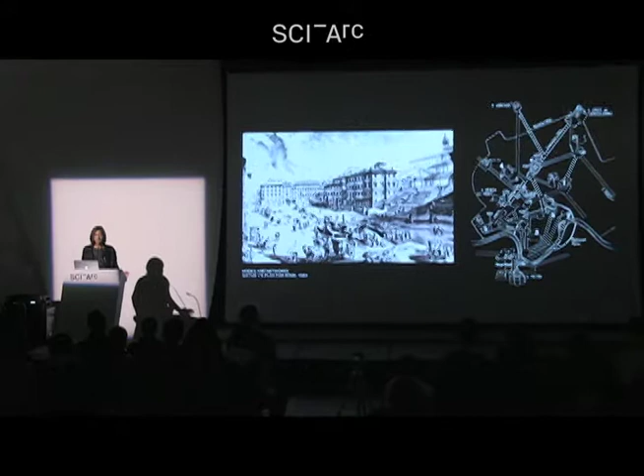When we started to think about Sixtus V's plan of Rome in 1585, here was Sixtus V coming into a decrepit city of over 100,000 people scattered over its topographical variations. He insisted on a network of diagonals that would lead you not only to monuments, but through the infrastructural connection of water brought through contemporary infrastructural terms freshly to fountains, which became the landmarks.

Which connected. Then 200 years later, with Specchi's Spanish Steps, the topographical challenge of connectivity could be either defeating and separating, or connective and so exaggerated in scale that the theater of connection became extraordinary. It became an inhabitable infrastructure that did so much more than just urban connection, but depended entirely on that network established nearly 200 years earlier.

This idea of synthesis, infrastructure, and networked occasions, in this case open-ended, a city that could actually lead you out and beyond, is in sharp contrast to ideas of fortification, like the star fortified cities that had an enduring history for several hundred years.

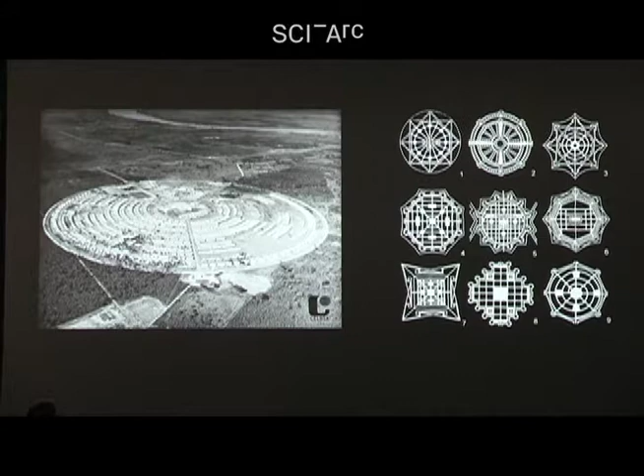When you think about the perfected form of the circle, fortifications were designed to keep others, unlike those inside, outside. I find it startlingly resonant with the backdrop of what's happening today.

If walls can be built to keep outsiders out, not linear or systemic walls but contained perfection, even temporal notions of round perfection are seen here with Villa Piloto, temporary worker housing for the factories of extraction important in Brazil in the 1960s. This temporal occasion made everybody immediately near the center, and the periphery itself a kind of fortification.

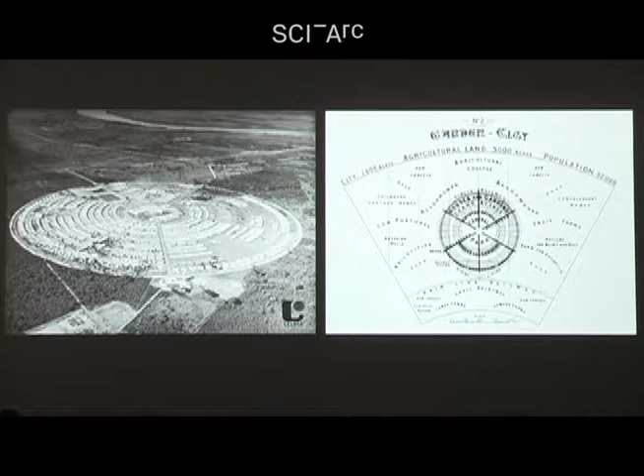But if you start to think of ideas of interconnectedness and isolation, the circle and those things around it, with Ebenezer Howard and others, started to generate the idea of garden cities. In those histories, the garden city of Ebenezer Howard's Cities of Tomorrow, or Geddes' Cities in Evolution, or Mumford's Cities in Development, the word cities is at the core, but the operative words tomorrow, evolution, and development are the secondary words that become intriguing.

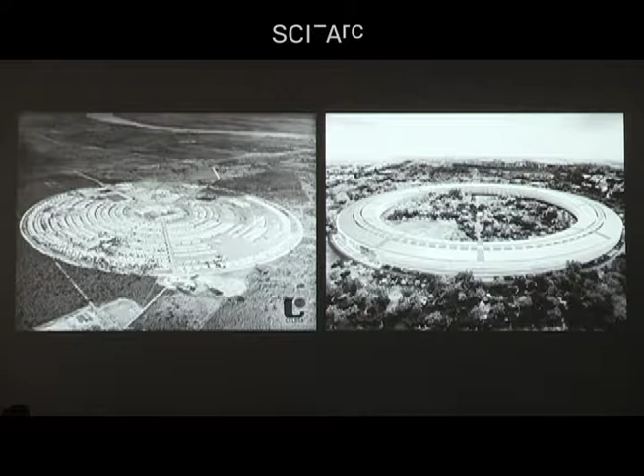But why this issue of fortification? Why is inside one thing and outside another? Why is there this enduring ambition with, in this case, over 2 million square feet of Norman Foster construction in Cupertino, expected to open very soon? Would we have a corporate campus for IT, looking as if it captures nature, but keeps everybody out?

So again, the form is important, but in fact the thing that's been our preoccupation is the connective tissue. And the connective tissue, whether natural or man-made, becomes an operative force that we are always in opposition to.

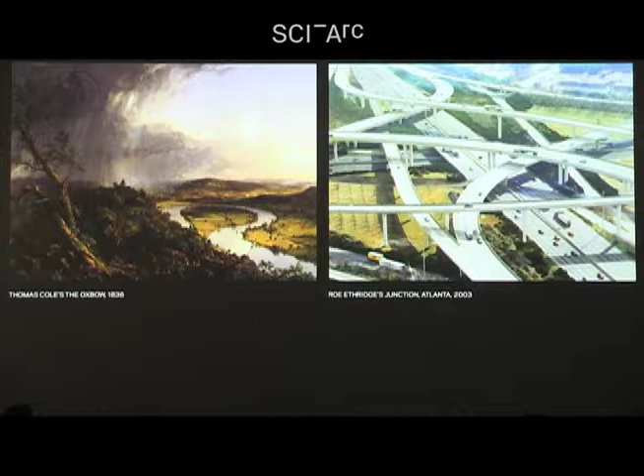If you look at Thomas Cole's The Oxbow of 1836, it shows the kind of wandering rule set that water can make in its own course, yet you see it in this truly picturesque setting that is very large. Roe Ethridge's Junction, Atlanta, one of my favorite incredible artworks, is indeed looking down at the artwork of infrastructure, which is so profound in the amount of physical energy embodied in concrete to bypass the very place it exists, to do this monofunctional thing to connect at great distances.

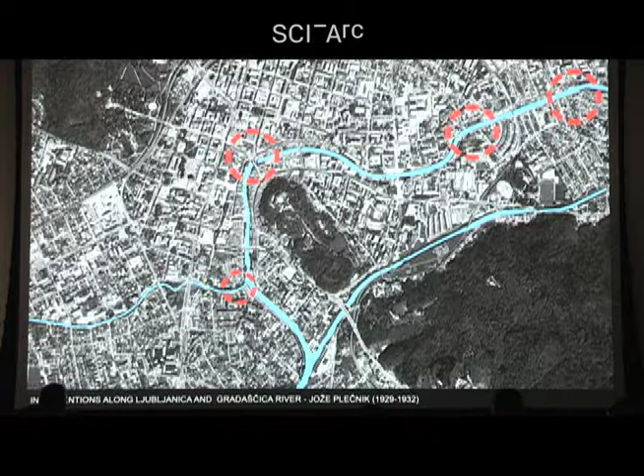Some preoccupations on our minds have to do with architects who are truly quirky and strange, in this case Plečnik in Ljubljana, who was preoccupied with the form of water in the city and the obligation to actually connect and fortify in the same breath. His triple bridges from 1932 are this astonishingly beautiful excess—he was kind of a Gaudi-esque character in his own way. There could have been just one bridge with pedestrian passages on either side, but instead he has the central bridge for traffic and two pedestrian bridges on either side, becoming a landmark of infrastructural destination and iconicity for the city.

He also worked on the fortifications of the walls. These banks flooded and became problematic, so you can see this notion of architecture and fortification operate further down the river. But less known and far more interesting to us is that as it pulled itself out of the city dealing with flooding, it became a stepped, relaxed fortification so that when flooded it would go up to the upper level. In summertime, when dry, it would create multiple promenades and levels, so when the city was most attracted to stroll, there was a multi-leveled promenade created by the absence of water.

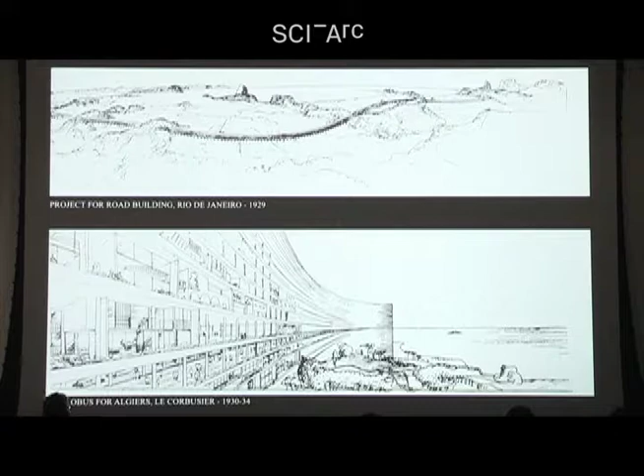So Plečnik really understood the operation of an inhabitable infrastructure—not so far off in the 30s and 40s from Le Corbusier's fantasies for inhabitable infrastructure: the project for road building in Rio de Janeiro, and then the Plan Obus for Algiers, where the notion of movement and inhabitation might simultaneously coincide and one-up each other.

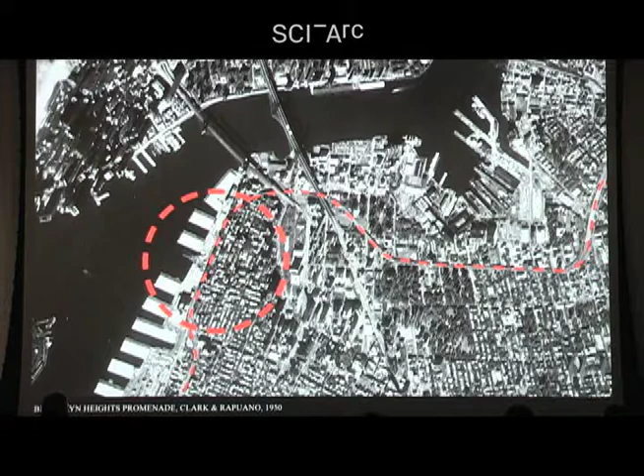Right near where I live in Brooklyn, there's this fantastic story where Robert Moses was going to charge through a historic little neighborhood with the Brooklyn-Queens Expressway, and there was a huge outcry. So there was an invention never before seen—here it is in 1950—leveraging the sectional topography of the 70-foot grade change from the city to the water's edge to create two lanes of traffic and a pedestrian promenade above. You can see this inhabitable infrastructure that is truly extraordinary.

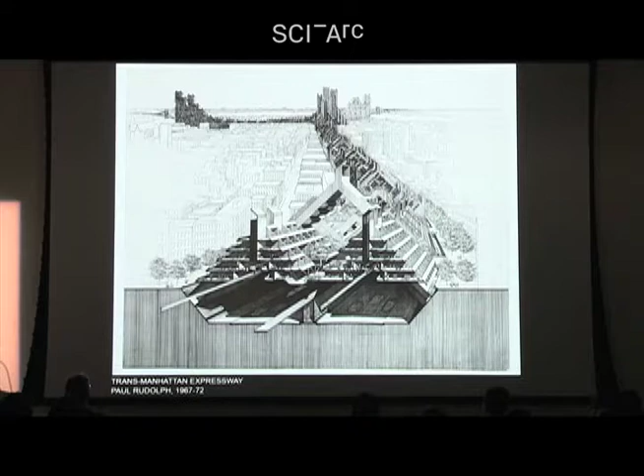That led to many other fantasies even later on. The Ford Foundation, all about cars, funded a fantastic study where Paul Rudolph came up with a kind of expressway or freeway that could cut through Manhattan and yet still produce housing in the very streets where housing could never exist.

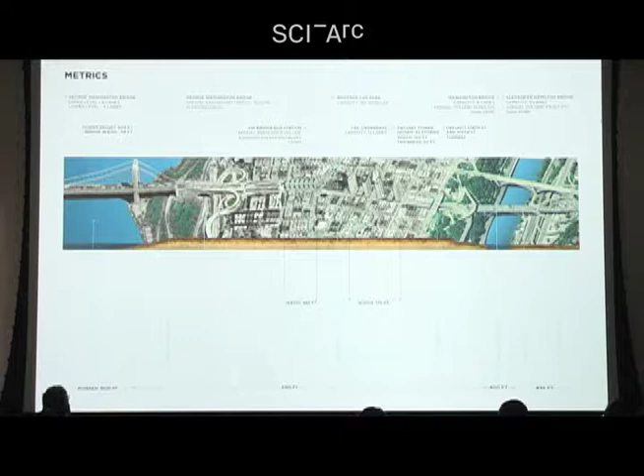This whole idea was fully realized, inspired by the GW Bridge as it cut through and tore down city blocks to continue across the island, producing the most incredible, incomplete, utopian product I've ever seen—the Nervi bus station, the high bridge towers that spanned across the cut and moved across the water. That incomplete utopia suggested all these things might exist at once. Nervi was the first Italian architect brought in to produce this remarkable form.

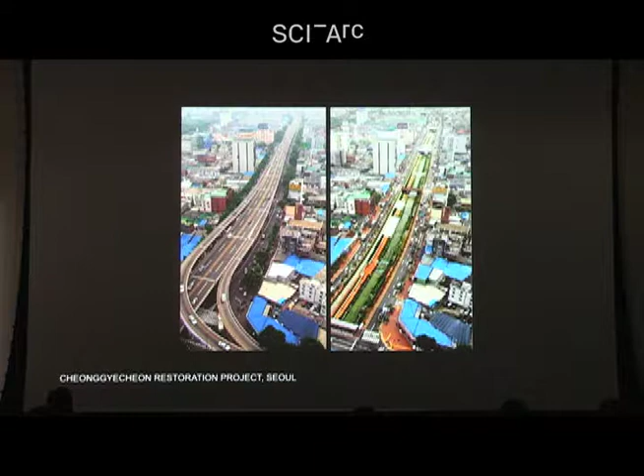But again, Cheonggyecheon is yet another thing—in Korea, the idea of a highway that divided was torn down to reveal a park and 27 bridges that could connect, reintroducing an ecology of a lost river that had been overcome by the freeway and returned.

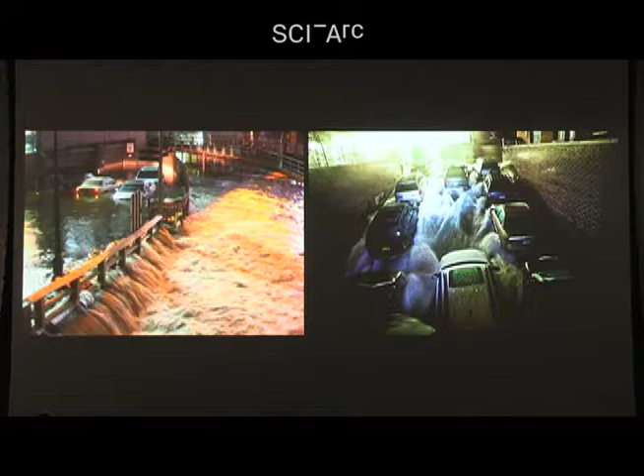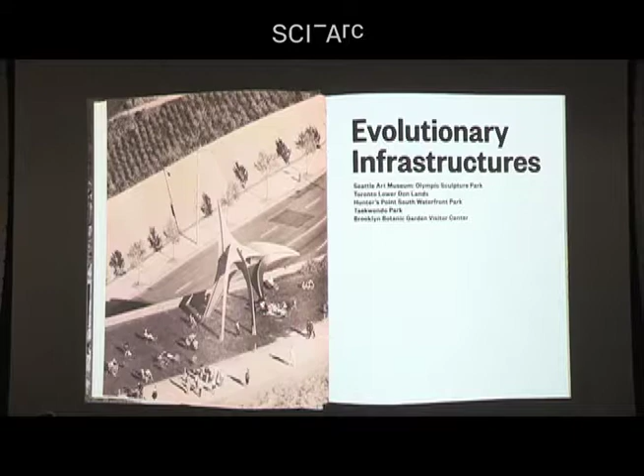All these preoccupations we organized about a year ago and produced a book called Public Natures: Evolutionary Infrastructures. Our thought was there were a couple of things we were preoccupied with: one was the notion of things that affected the structuring of public space in the city, and the other was social infrastructures that create a scaling of place that might reach out and have more territorial engagement.

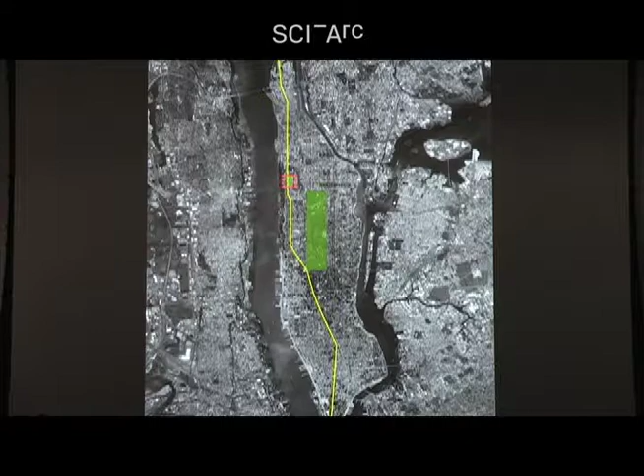So what I thought I would do is share some images here, a small snapshot of projects that are both urban in nature, but actually take the thesis from material expression back into a territory that hopefully engages the city.

Barnard College, right across from Columbia University, a women's college, only 4 acres, quite a comparison to Columbia's neighbor. But very much like Columbia, surrounded by walls, and those walls marked by gates, and in fact the Women's Campus Center, because it's a women's college, marked by concrete.

They wanted to do a creative arts center, and so we said, let's find out what's behind the wall, which were two layers of landscapes 20 feet apart. And we said if we need 100,000 square feet of building, then somehow we might connect two divided landscapes, but also create interior topographies that might carve through architectural forms to bring sectional connections.

This in this case involved tearing down the bowling alley, which was a social center for the school a while back, and turn it into a topography that connected divided landscapes, taking the kind of crosswalks of a campus into crosswalks on the side of the building.

That might actually reveal inside the kind of connective tissue that creates a social infrastructure of engagement, so that everybody in the architecture studios on top are looking down to the cafe and reading rooms below. This notion of specular use, normally hidden through section, is actually utilized in spaces that could be interconnected and woven through movement.

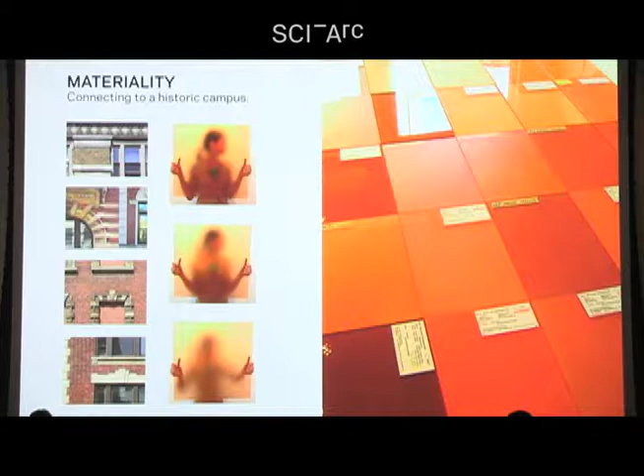And then ultimately that expression of movement and engagement is something that's inscribed and projected from the surface of the building, but that surface wanted to have the indefinite character of the brick campus through a new medium here with externally acid-etched terracotta color chromatically infused glass that correlates with the bricks.

Offering some kind of compatibility that ultimately, as it joins the family of brick campus buildings with its own stature, has some capacity to transform what is a wall into something that is really an illuminating reflection of the section of engagement inside the Diana Center.

So that first question of whether it's part of the city or independent becomes all the more confusing when we start to think about the idea of landscape and city.

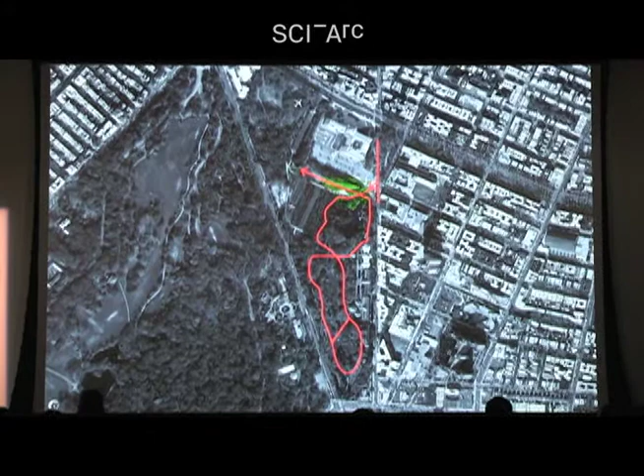With the Brooklyn Botanic Garden, we had this very interesting question of a 52-acre garden embedded within the city, but has always had some very strange relationship where the city looks like one thing above and the gardens look like something entirely other on the other end.

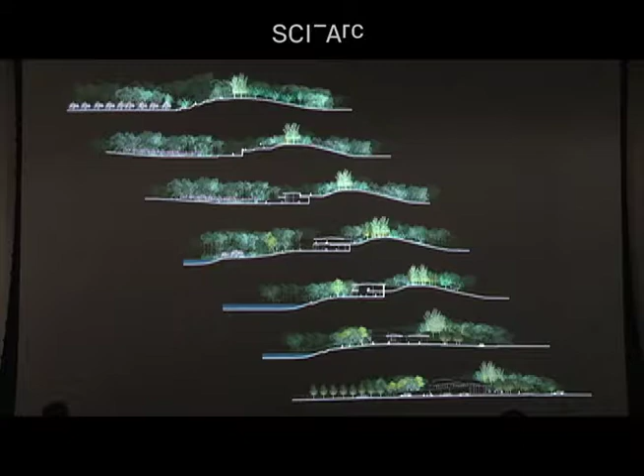Find yourself moving from the city and leaving it behind through a kind of sectionally modulated gradient that is part architecture, part building, part infrastructure.

So that kind of wandering guise of trellis light through the acid-etched glass above, or the radial conditions marked around the tree drip line that we had to watch out for, this very fantastic tree.

And then the kind of flat iron effect of choosing the city to the left or the garden to the right, or the visitor center inside with its own orientation, or finally the only two-sided room in Brooklyn that seats 160, is really this idea of transference of what it means to actually host and inhabit an edge of a path.

To inhabiting a landscape, to embodying the whole idea of movement above and through, so that the upper level of the embankment of the garden allows you to simultaneously see garden and architecture. And in fact, sometimes the architecture disappears because it's a high operation green roof that has 44,000 different plants that change over time.

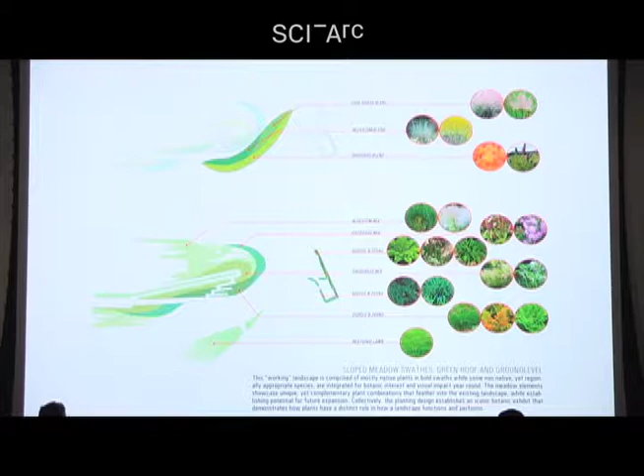That have seasonal capacity to become invisible in the park, that hosts new life, problematically so, but could be almost something that disappears when seen from the Japanese garden, so that the architecture itself is far less important than the garden it produces, but it ultimately is this tethering line between city and garden.

Now, again, we enter a lot of competitions because competitions ask bigger questions. And the Sylvan Theater competition, which we were fortunate to win on the National Mall in Washington, took the idea of this outdoor theater, which is the only outdoor public venue in Washington.

The rest are monuments or indoor memorials or Smithsonian institutions. But it's really on the sleeve or the corner or the edge of the Washington Monument, 400 feet away.

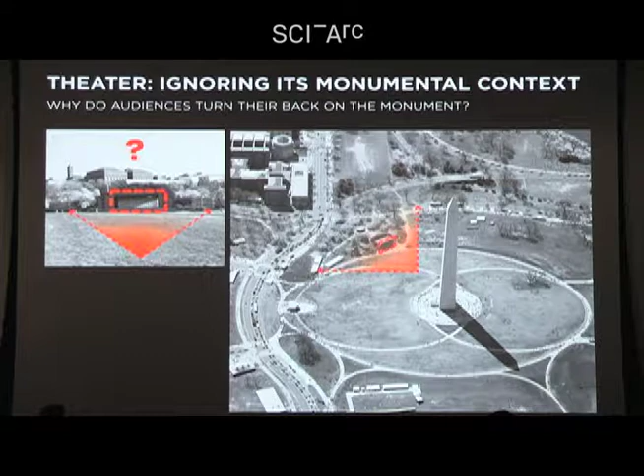A kind of sad remnant, rebuilt in the 70s even though it was visualized in 1917, as this plywood affair. You could see where it's located with the bathrooms in the back, the tour buses behind that, and everybody was looking from the mound of the monument terrain to that backdrop. They wanted to re-envision it and make it better.

Our point was that, in fact, if you made it better, you'd still have right behind you the buses. But if we could think about it further, we could actually say that maybe it takes monumental Washington and even the beauty of the tidal basin and simultaneously create a new theater, but also create new connections to landscapes that have been divided permanently by roadways.

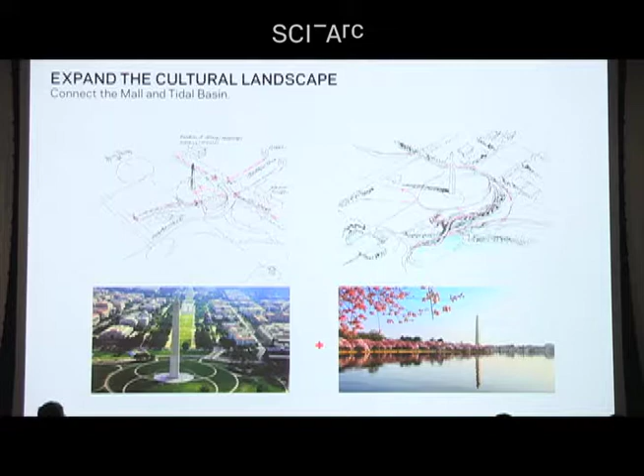So taking the notion of Sylvan, which had been her goal, to make it truly Sylvan with a grove of trees inspired by things like the Swarthmore Amphitheater, we did the most important thing, I think, which was to question the existing Sylvan Theater's orientation and suggest that the backdrop should always be the Washington Monument, not the buses.

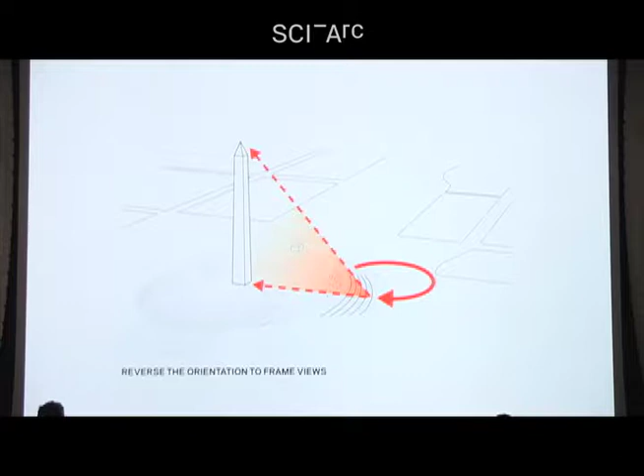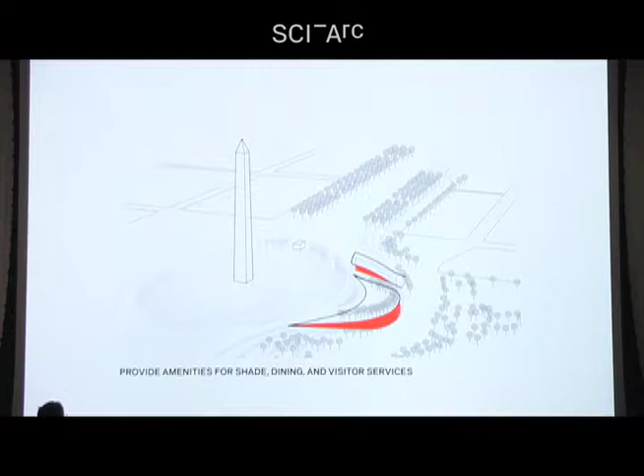And that if we could reorient that, we could actually lift the land, and through that lifting of the land, house all and conceal everything that was not so great to look at, like visitor services and the restaurants, et cetera, underneath an earthen berm.

By the time we get at the top of the earthen berm of this amphitheater, we'd be clearing 26 feet over the freeway so that we could actually wander over to the tidal basin and simultaneously slip down and stay within the required height that could not exceed the base of the monument. You could start to see the mapping of it, but the whole point was for it to be incredibly impactful and barely visible. And that's a tall task.

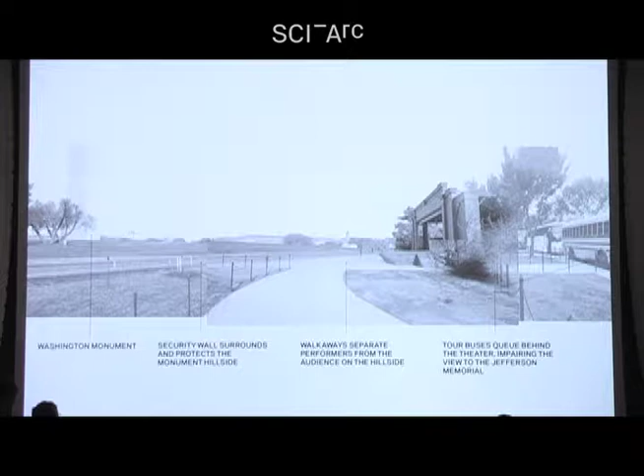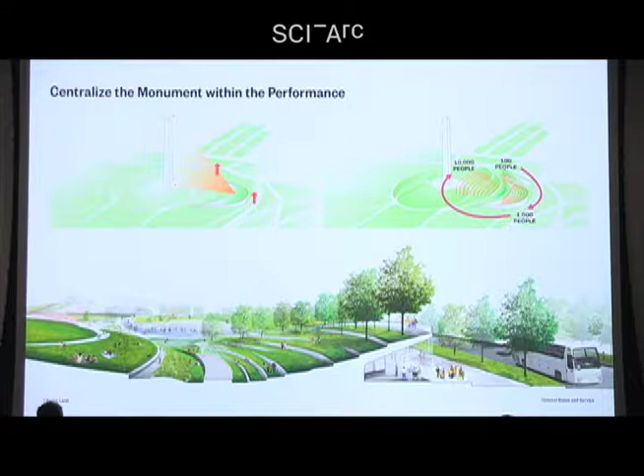And then this is showing how the operative section actually allows us to have groups as small as 100 or as large as 1,500 or 10,000 people with this three-sided theater notion all at once in the pavilion, for the kind of first food service, if you will, on the mall, will be just beyond.

And that lifting of the kind of dining pavilion is something that, again, can only cap out to the top of the mall. But the idea here really was to say, as barely there as possible could be the invitation potentially for some magic. Okay, it's not quite a smooth animation.

But again, the next question really for us got to questions of how to take very hidden things in institutions and universities -- in this case, University of Pennsylvania -- and take the Nanotechnology Building and try to make an urban statement for the most hidden yet shared service of an invisible science being forged there.

Now, the interesting thing for us is that as we started digging into nanotechnology and got ourselves lost in that kind of world of research, we started looking very hard at the city of Philadelphia and West Philadelphia, where the university is, and noticed that the one thing that they all shared in terms of identity were a series of green spaces.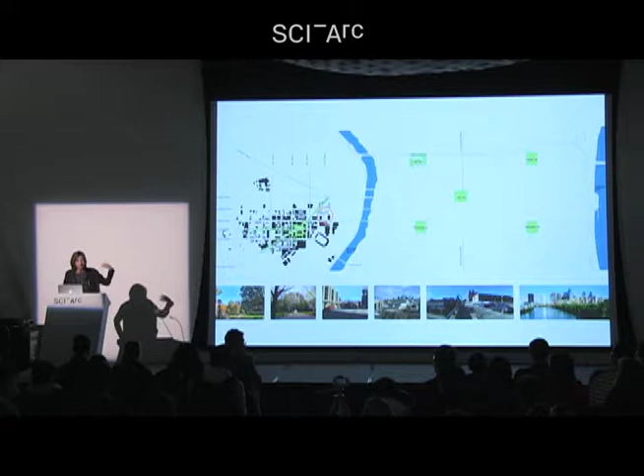So that was interesting when we looked at the engineering area, because there was no landscape to be seen in this particular area -- not one of the most compelling parts of the university, but closest to the city itself. So what we started to look at was this question: well, the whole engineering area had no green.

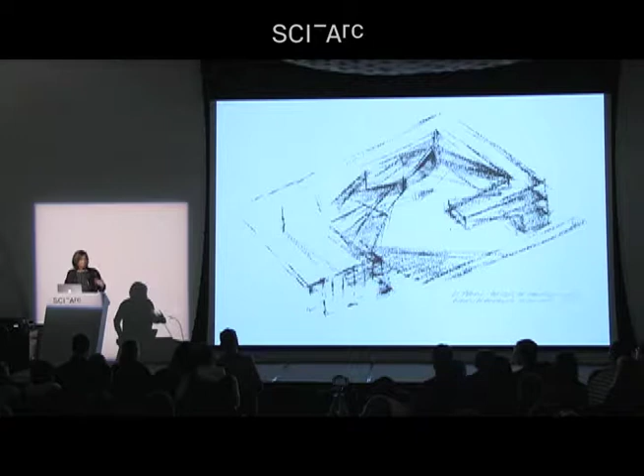And if you look at the upper diagrams as they unfold, we actually had to keep most of the boxes of those labs in the back of the site because it's the most vibration-free and electromagnetically free. They were very site-specific in terms of those labs, but others could strand to the city.

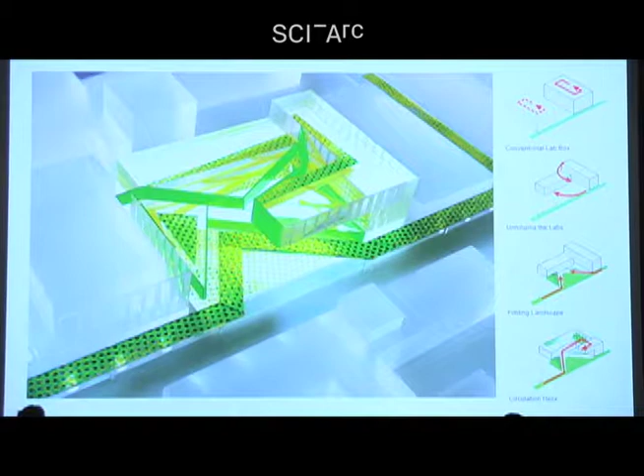But the only thing that didn't have vibration criteria that was controlling of the actual research work was the place of gathering. And so while the program required that there'd be a gathering space on the main floor, it was the most important space to locate these vibration-free things.

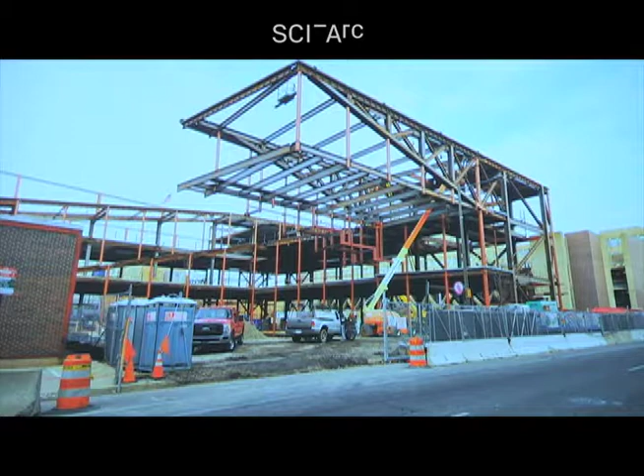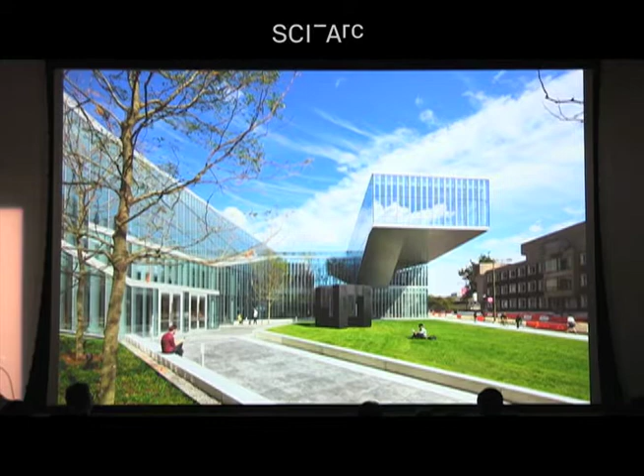So we actually moved up to 40 feet, the place of gathering. Now that's a weird thing because we wanted to also produce a large green. And so by elevating it, making it column-free, the 68-foot cantilever does a lot of work. You can start to see the operations of unfolding, engineering that unfolding so that it could reveal, in fact, a green.

So you can start to see here, there was also a great uncovering. This is Tony Smith's piece, We Lost, which was found in storage by the Dean of Engineering, Eduardo Glandt, who was our most visionary client. And so that became the kind of icon, if you will, of the gateway. But what became more iconic for us is how do you reveal this hidden science?

We visited all these nanotechnology facilities. Almost all of them are in the basement because the earth mass is the most vibration controlling, and they could also have no natural light in there. They all had little orange portals to look in. We said, well, what's up with the orange portals? They said they blocked out the UV rays, which they couldn't let in the light. And we said, well, what if we made orange portals into a whole wall and had no barriers? Could we do it? Nobody could say no, because it actually could be done.

So this is the first and one and only amber wall that reveals all of the nanotech research that's going on in the clean room. And then in those areas where natural light could come in, we pulled into the basement spaces natural light, where the most vibration sensitive but not light sensitive work was going on.

But because lab buildings have a 20-foot floor to floor, which is truly huge, and the elevators had to be at the far extremes of the building because of their electromagnetic interference, we had to, according to the Dean of Engineering, who's from Buenos Aires - he said, you must make the most delicious stair for everybody to go up. So, of course, that was a pretty interesting query, because every landing then became an opportunity for collaboration in our mind, because we had so little footprint for social space that we had to grab every sectional opportunity to do so.

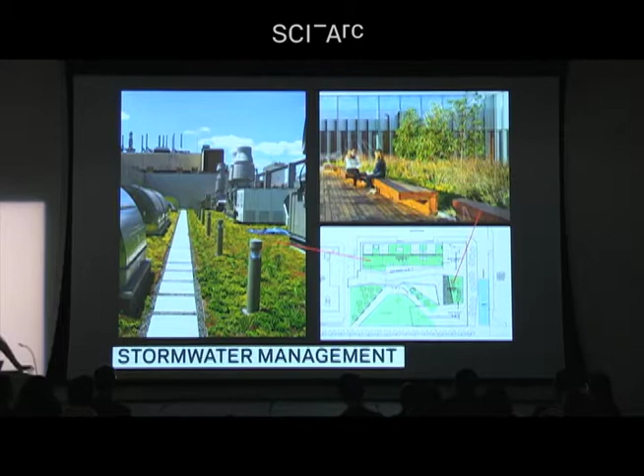Stormwater management in Philadelphia is a huge job. And then you could also see that the issue of the surfaces of these things became interesting, and we actually folded where we had to have opacity, folded metal that could catch light, but we used an externally acid-etched patterned glass that was fritted on both sides to be able to create this illusory presence of transparency that would actually amplify the sense of it being not just a glassy building, but something that was other.

And so ultimately it really is an idea about a place of research for the most hidden, invisible kind of science becoming a protagonist with this larger urban and institutional setting.

And so this idea of becoming a protagonist in an urban setting actually took off most recently, and this just opened in October, at Kent. Some of you might know the Kent State shootings - that's probably what they're more noted for, and reluctantly so.

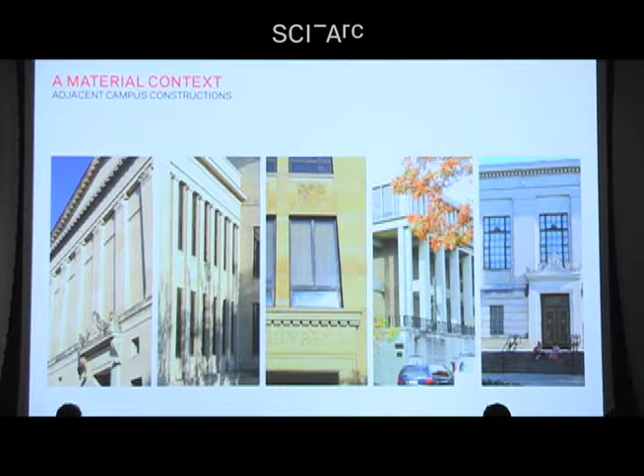But they were also trying to connect to the city, and they held a competition to say, we need to do an architecture building that connects to our newly realized downtown that we are collaboratively doing between the city and the university. The whole thing being a strange invention of kind of funny colored bricks of a variety of patterns, connecting to the university, which is a really rich collection of limestone and also these kind of warm amber toned stones. And so our feeling was that somehow the landscape too was a larger connective tissue, and that we couldn't leave any of these things behind, but actually had to truly forge these connections and have the building do a tremendous amount of work on this site.

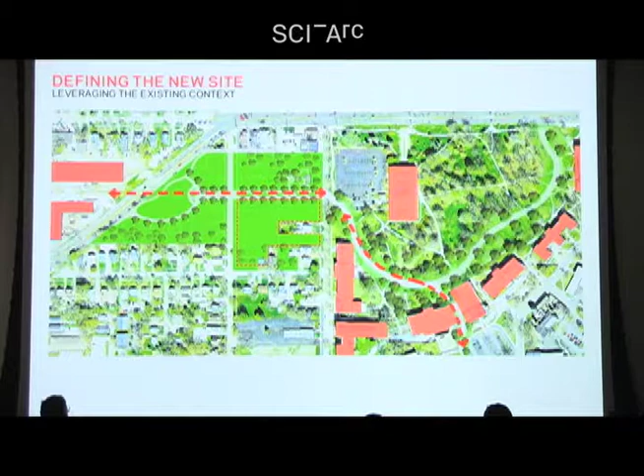They built an esplanade in true postmodern illumination. But we said if we actually followed that esplanade, we would have only had a head-on relationship to the campus and to the city. But if we could take that program and tip it slightly, we'd be able to reveal more to the city about what's happening within the world of architecture inside.

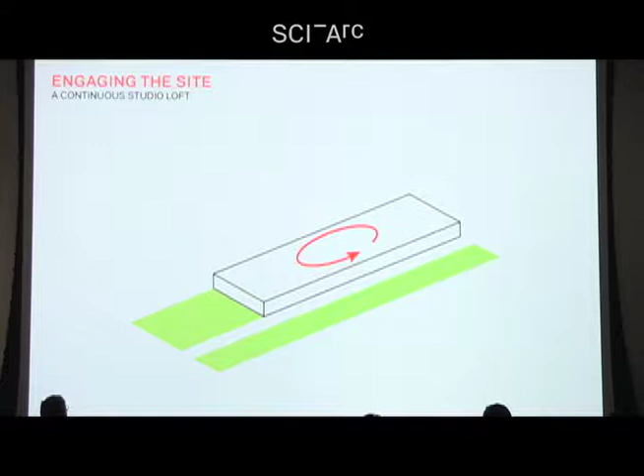And so the operations of actually stepping down to the academy to be the height of those buildings, and reaching up to the city to be the height of those buildings, and to open up these studios themselves as lenses that might ultimately connect and reveal what's going on inside, in many ways took some of the clues we explored in the Barnard building and even the Nanotech building, which was creating something that might begin gravity bound and finally ascend and release itself off the site.

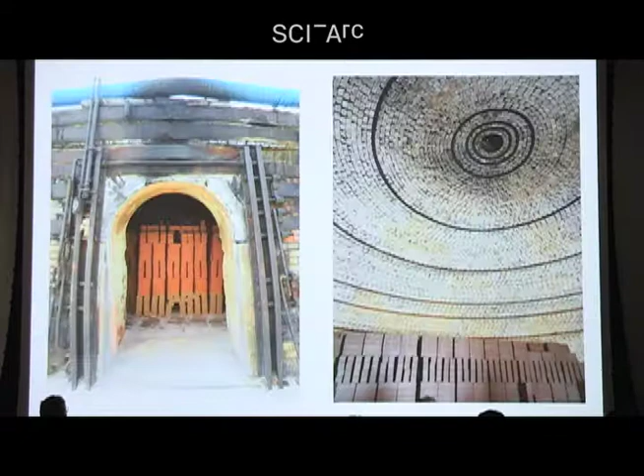Now, what became very interesting is it's a super simple building, and it means that everybody can be within eyesight of each other. Very simple studio section. But what became quite interesting for us was the material of cladding that section.

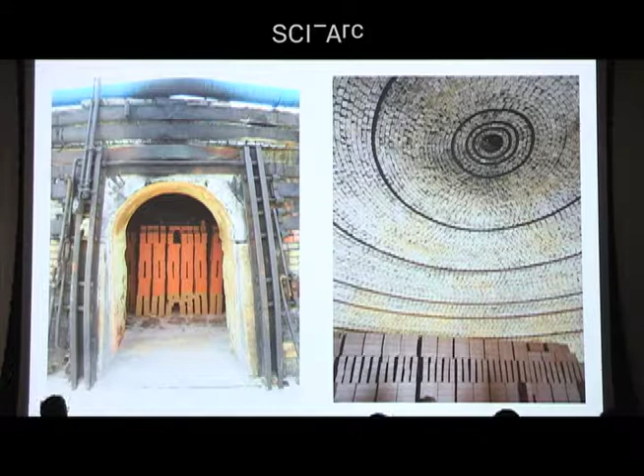We discovered that the Belden Brick Company, with their beehive kiln, an ancient technique which fires these iron spot bricks, could produce 7 different colors through one clay, depending on where they located it within the kiln. And so all these different color iron spot bricks begin to add something that's not so much monolithic, but somehow richer. We had them do a custom brick that could cantilever 4 inches without any kind of steel reinforcing. That was the maximum dimension, so that we could start to get some tactility that would be expressive and accessible for a building of this super scale.

This is a girl who, just when it opened, was rubbing her hand as she walked along the sidewalk because it's an asymmetrical fin. But it really does add, even at nighttime, a kind of texture that is a huge contrast between the luminous boxes of the studio. In this case, the studio facade, if you will, in glass, is that which faces the university, and if you look up inside, you see that whole escalating transparency.

And there it is, the studio. Kent doesn't have computers yet - they may soon. But hopefully this building will invite a sense of engagement, and you can see the studio critique spaces there, the glass boxes, so that everybody is always being seen while they're being critiqued, but everybody's always within eyesight while they're working too, and there's a cafe space on the lower level.

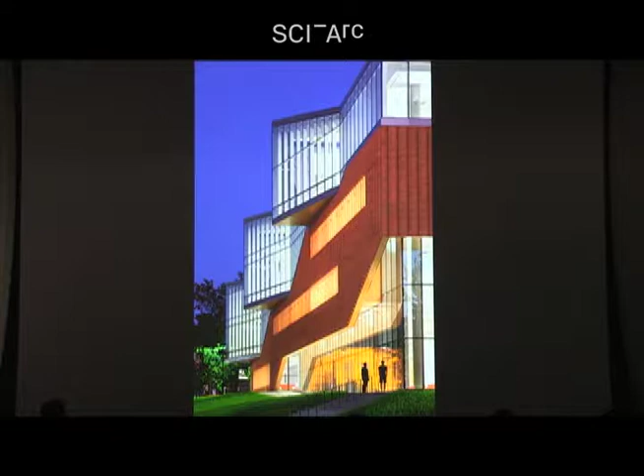But really it's this idea that you could totally elevate this question of what it means to have a studio environment that's part of the city and transforms the city - a library here that has a materials library on the 2nd floor, offices above, but ultimately in some cases within the town it totally disappears. And within the landscape it kind of reappears as part of that connective landscape.

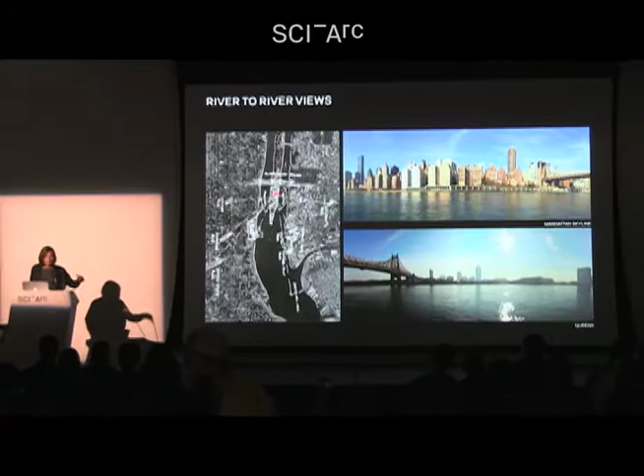So Cornell Tech, Roosevelt Island, strange city. We participated in a competition, and in fact we're in the thick of now experiencing what it means, because we're almost done with construction - it'll be done in the fall. But it's a strange island that has always been a place of fantasy, and you recognize Rem Koolhaas here, but in fact it's an island that's just as vulnerable to being underwater as any other part of New York City.

And so we started to think about both its panoramic capacity to have water on 2 sides, and then Cornell Tech trying to create a kind of hybrid campus that embraces the entrepreneurial world of tech on one side, and then the whole idea of directed research on the other.

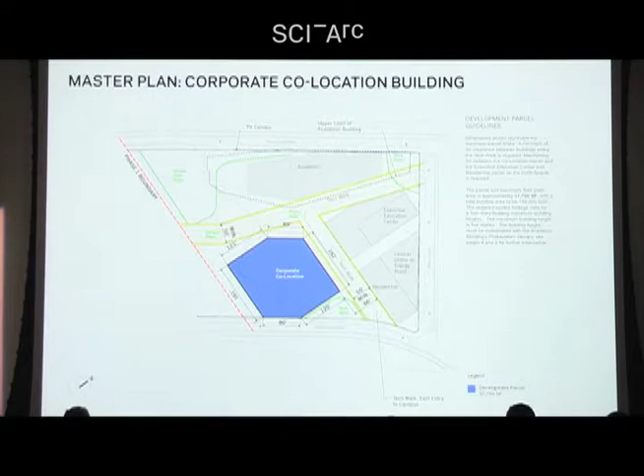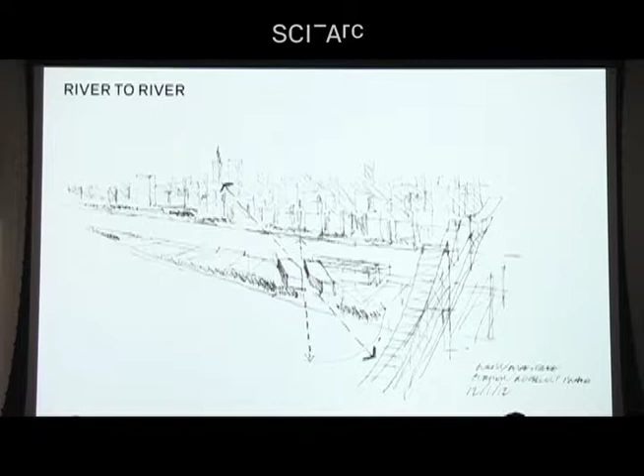And so there was a master plan that was done by SOM, field operations doing the landscape, but they gave us this very weird site - big, boxy, and a barrier. Our first thought was, oh my God, it's just dividing the island in half. So what if we could actually cut that site in half and offer river-to-river views and create 2 crystalline perimeters that would have everybody joining at that hourglass place, so the desire to have the entrepreneurs and the academics connecting could be made possible through this whole idea of illumination and connection.

And so you can start to see the plan. Thom Mayne's building is on the left there. We've had a lot of fun kind of working and overlapping together. Our buildings are going to open at the same time.

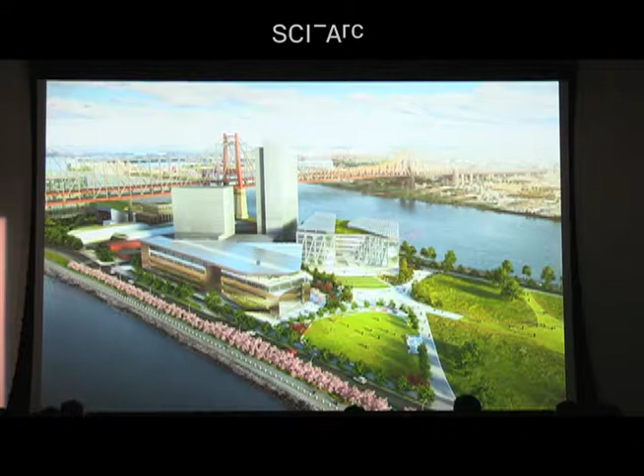You can see this whole idea that we're actually using the landscape to carve through the building and grab and leverage things like the section of that landscape, pulling it up and elevating it on a plinth because of the water levels. You can see Thom's building close to us and our building in the back with the green roof. The idea is to use the cantilever and the trusses to clear up and free up the landscape while doubling up the interior space.

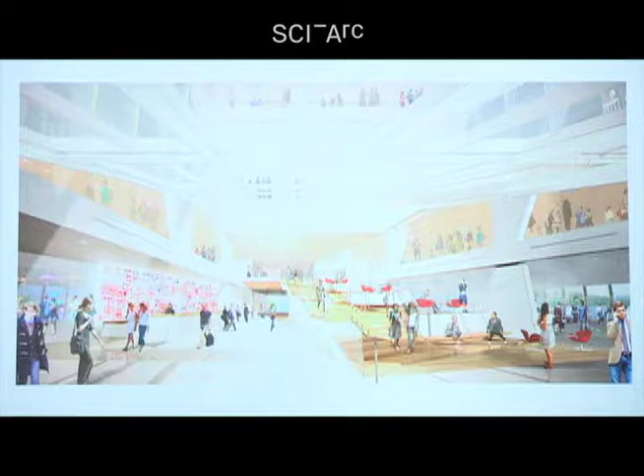Inside, the topography of that landscape by Field Operations makes its way inside the building and takes you up to a piano nobile, which is the entry of the Cornell Tech space.

We learned from the Nanotechnology Building that if we're going to have a grand stair, it better be a place you can spend time on, and there are only so many amphitheater stairs you can do where you still need to furnish it. So we have these robust intermediate landings that have a whole lot of places to plug in.

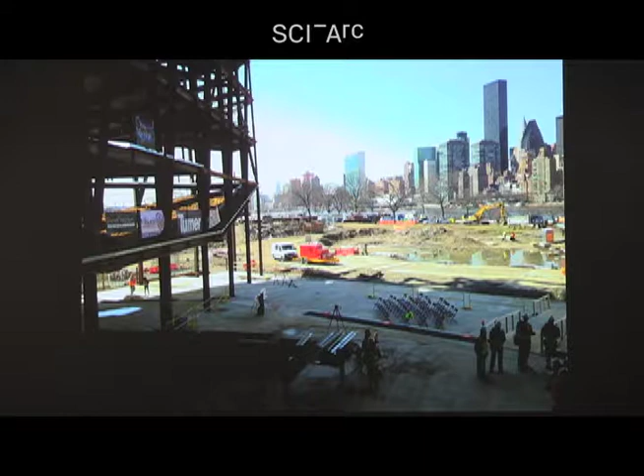It's under construction, further along than this, but you can start to see what's extraordinary is the views that it offers out. It really operates as constructing islands within the island and vistas across the water.

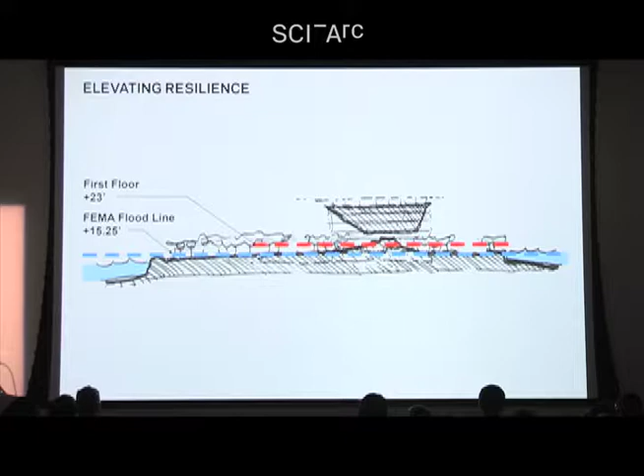This whole idea of keeping at stake, even at a very fundamental level, elevating yourself from the water level and the flood line, could inform these kinds of connections to ultimately create something that collaborates as a university with the buildings and the landscape around.

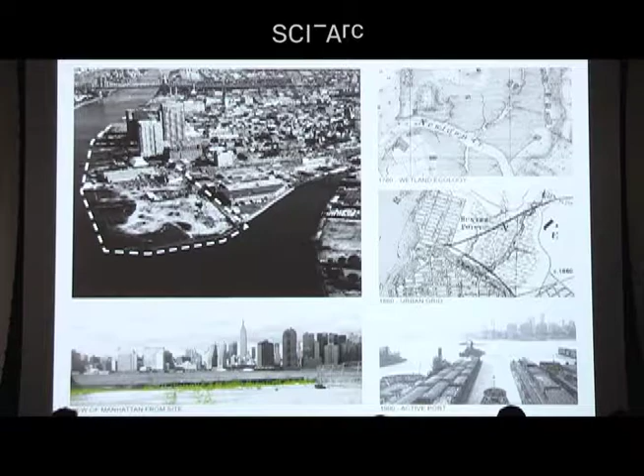Just within eyesight of the building, we're working on Hunters Point South Park, a park that's completed phase 1, a post-industrial site where they're actually trying to do the largest affordable housing since 1970.

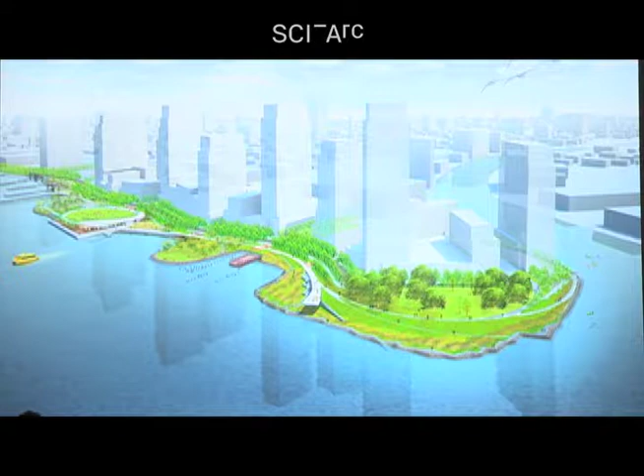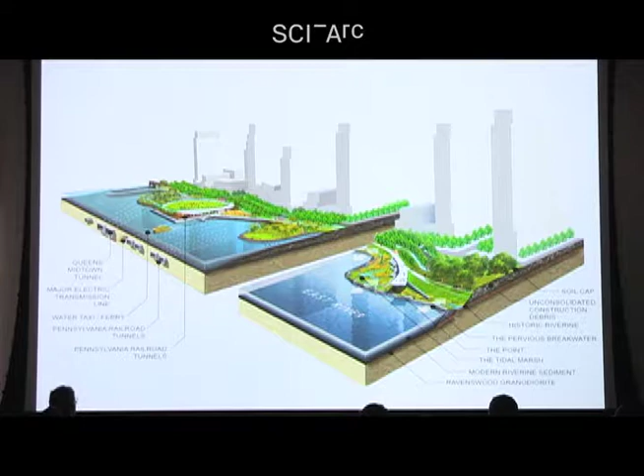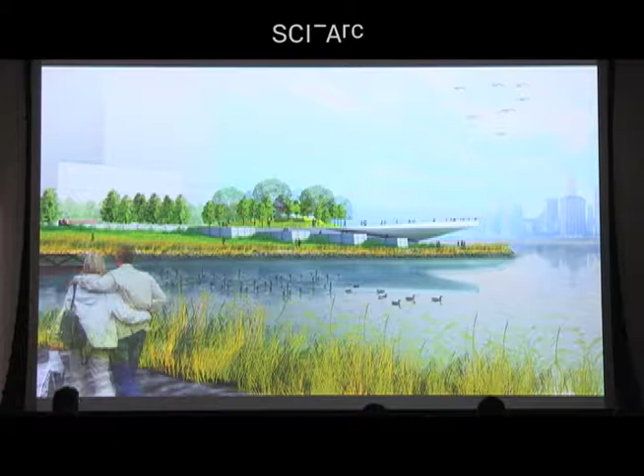You can see the cantilever - this is phase 2 under construction now. I'll show you phase 1 completed, where we could take advantage of it being the highest point, believe it or not, in all this area across the river, to look out, and also allow that soft edge to look in.

These drawings are both concrete, but this whole gravitational arc of steel is one where you can see the pavilion that hybridizes every functional need - cafe, pavilion, restrooms, park rangers. Here it is in the kind of submergent or winter stage.

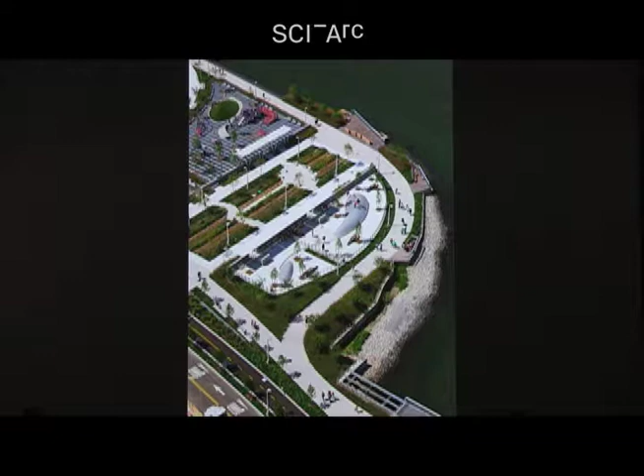But here it is right now where it truly organizes a central green, and all the high-intensity play areas come down over here. Working with Thomas Balsley and Arup, you can see this rail garden landscape that looks out.

It's been a wonderful way to both bring the community back in, resurrect a beach that was lost, create a playing field which is completely artificial with a crescent of green which is totally natural, so that people like Bernie Sanders can have an event or a rally that hosts a large gathering, or something as minimal as a pickup softball game. It's right across from a school, so they use it heavily.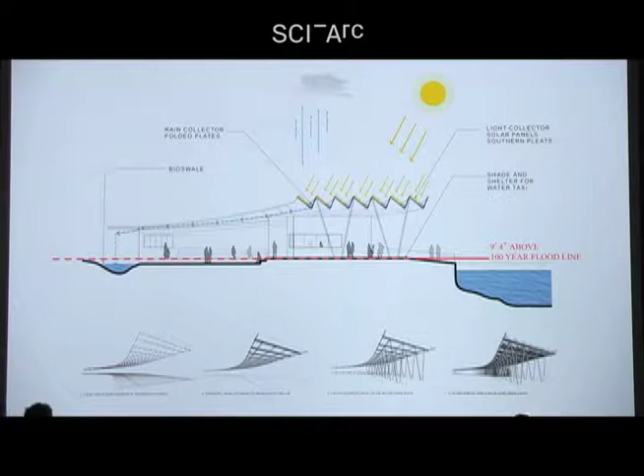The pavilion itself is hardworking - it collects all the water for the park, and because of its back cant, collects all the energy to light the park with solar panels. It also provides shade for the water taxi. This issue of simultaneity is really what's truly at stake here.

Ultimately, it's a place of connection and a place of prospect, so that while it's finite, it borrows a tremendous amount of the city beyond.

So the last project I'll share is the Olympic Sculpture Park in Seattle that Elena mentioned, and for us it was a fantastic competition to win because we couldn't think of a better client, a museum shaping a piece of the city on the waterfront.

And in fact, it was an amazing thing. It turned out that this waterfront site had actually been created through this fabulous thing by this developer, Denny, who basically wanted to create land. And what you see here that's so amazing is that anybody who wouldn't sell their home, he hosed around until it became challenging and problematic for them to keep their homes. That's what I call a developer without an environmental twist, but amazing.

And so it produced this land. Everything from that middle road there is all new towards the water's edge.

But when the museum held the competition, they were a little coy about it. It was actually three separate sites: a contaminated Union Oil of California former site, a highway that was a federal high-bodied, wide-bodied truck route, another slender site with the train lines, and then a tiny little slender waterfront site with a crumbling seawall that the Army Corps of Engineers said would take about $70 million to repair. But they wanted to create a park all through the lens of art, and said if they had enough money, maybe they could cover up the infrastructure.

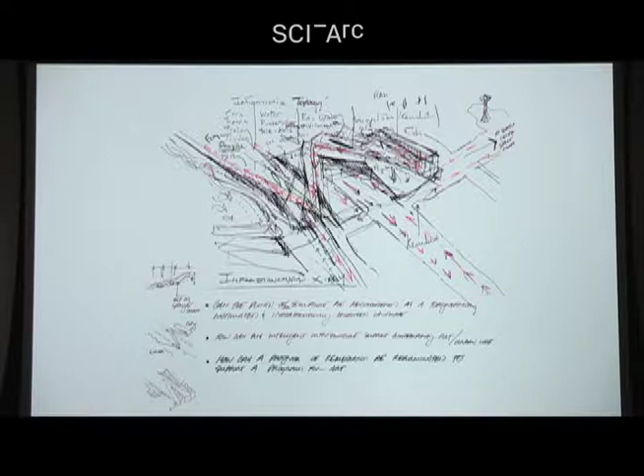So, but you can see this whole idea of these arrows look straight to the city, look straight to the port, go down to the beach, and somehow have a Kunsthalle in the middle of it. But all these kinds of systems need to be thought of all at once.

And by the way, because it was formerly contaminated, we had to create these kind of contamination wells for monitoring.

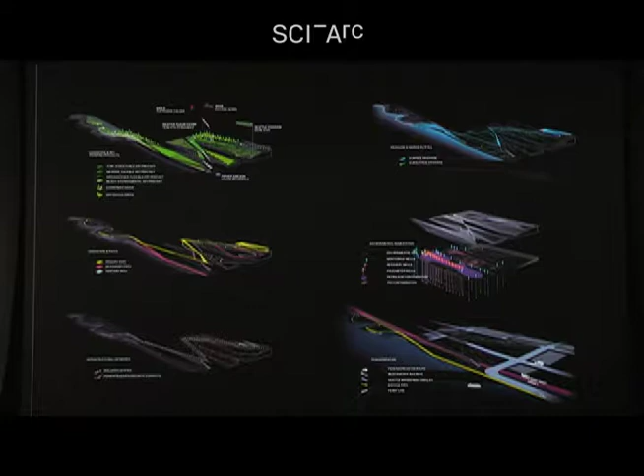But as a landscape for art, it's a landform that actually has these serial sections, with 365,000 cubic yards of earth brought from 11 blocks from an excavation site nearby. We shaped a topography that could clear 20 feet at the highway and 23 feet 6 inches at the train lines.

We actually used highway construction techniques with what's called MSE, or mechanically stabilized earth, to build up a false topography that would be highly stable, with precast walls here going up another 42 inches to be like a guardrail.

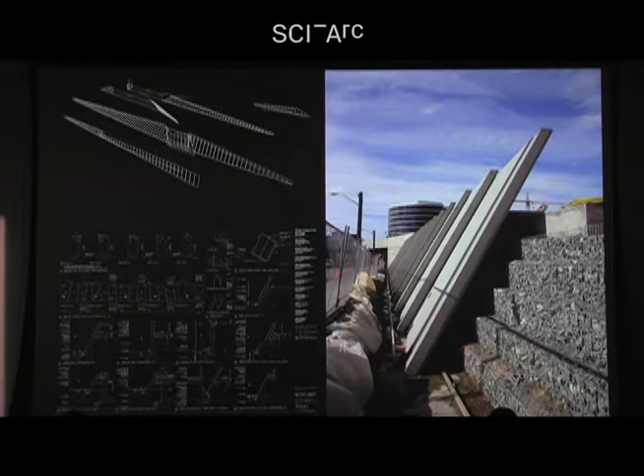The precast walls are fabulous because it's a seismic zone, and their overlap allows them to move 4 or 5 inches with no damage whatsoever in a seismic event. And so even that trope makes it all the way into the building.

And what you'll see if you look closely is at the edge of the overlap, we did a high sandblast to abrade the surface so that if indeed there is seismic activity, it's pre-abraded. So look closely at that—you can see the two different colors there.

But it was called the Olympic Sculpture Park because the donors felt that it was the Olympic mountains beyond that were far more important than the names. And the Calder Eagle was the only work of art that they owned at the time they did the competition.

But what you can start to see is that all these topographies became an opportunity for us to have a super simple, Z-shaped, totally groomed lawn of a landscape, and to have meadows that would change and be green or dry, actually showing the temporal characteristics.

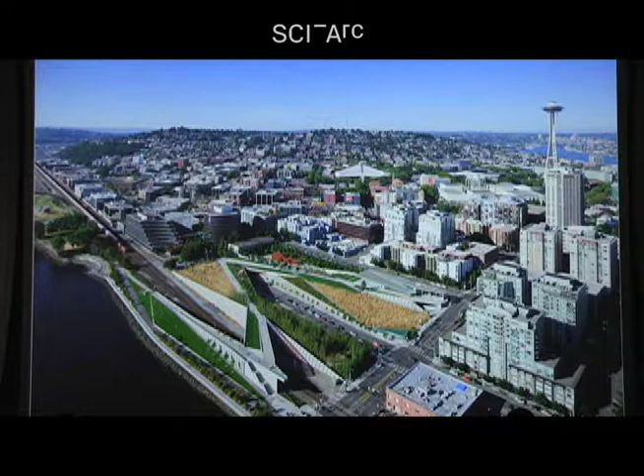And then you can start to see things like the valley with the evergreen trees holding Richard Serra's Cor-Ten piece, Wake, or all the way down to the edge you can see the beach. So these are just some before and after images here.

This is the pavilion itself, with 67 cars below, and a kind of Kunsthalle above, and a portal or gateway for the bridge crossing, Roxy Paine's tree, and a kind of specular folding of the metal that allows the city, even as cars drive by, to become part of that expression of the site at night. And then a mirror star glass, which is part clear, part mirror, that faces the city side.

And inside, the idea was that changing artists and younger artists would have a chance to use this space. This is now from the mezzanine level, looking down at the cafe and looking out. A super tough, simple structure that could hang and hold almost anything.

And then you could see here the work by Pedro Reyes on the mural and his suspended capulas that you can inhabit. They're hanging. I don't know what anybody's liability concerns are with inhabitable artwork, but it did fine. And you can start to see that this now frames views out to the port.

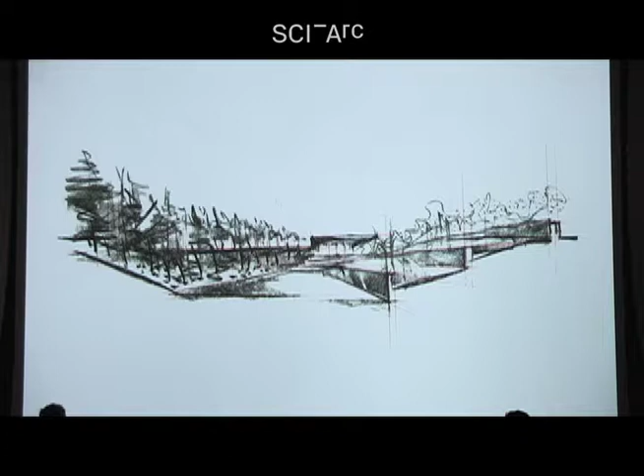Again, that kind of folded stainless steel wall allows you to look into a slot window only 6 feet high. But again, you can start to see our thinking here, and this is a drawing that we were working on to actually organize topography, to frame space so that you could get away from the roadways and be captive within a valley, so that Richard Serra's piece here could be an amazing thing that people might bow down to through the act of yoga in the morning.

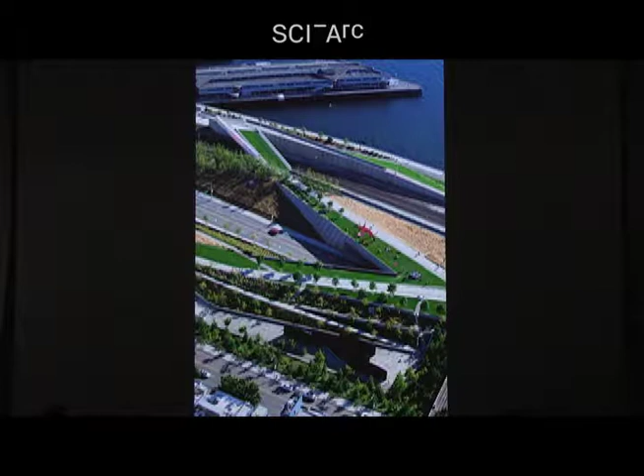And you could start to see that those terraces that cover the parking garage, which extends all the way forward, also becomes and produces this amphitheater that simultaneously connects to the valley. And all these armatures are operating in section, so that even as we traverse and cross that highway, that single little point is something you can start to see, allowing you to simultaneously experience it in a car as well as a pedestrian.

And so this is the actual point. That point in concrete is the dead center of the trucking route. And the idea here was to not give you a shortcut across the site, but, like a golf course, to elongate and stretch out and make as long as possible a journey across 9 acres.

And actually, even as you're going through that point and driving through, we'd like to get a little kind of trip switch so anybody who drives here can be counted as a visitor of the sculpture park. But that really is saying that anybody even on a train going up to Canada could experience this bridge.

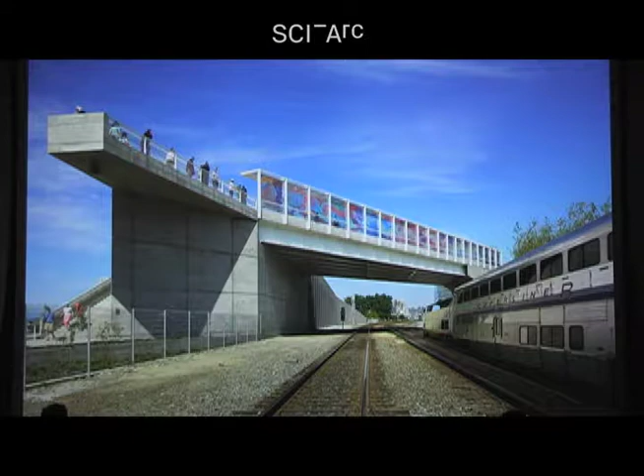And we worked with artist Teresita Fernandez. She did the glass piece called Cloud Cover, which meets the obligation of a throw fence that needs to go up and across over the train tracks. In this case, you can see we actually got a cantilever for the train spotters. But her work does these remarkable things which cast light on the infrastructural wall, so that now there's a toggling oscillation between the art and the infrastructure.

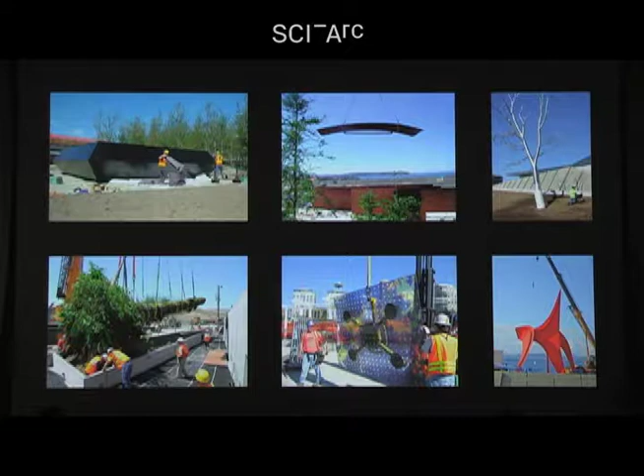And so the art and the infrastructure, if you will, even working with Mark Dion on the lower left to make a corner piece, or Richard Serra, or Tony Smith again with the Stinger, or Calder, who had created the Eagle before, could actually allow this journey of art. In this case, Richard Serra's Wake being assembled and driven from Long Island City on 10 trucks to the site. You can see him here.

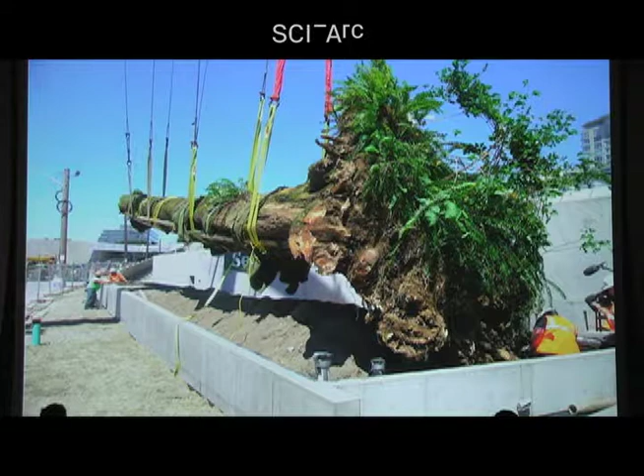Or the Mark Dion piece here, which holds the city corner with a rotting nurse log, 70 feet long, hosting under this green glass the artificial nature of a fallen tree in a forest right in the heart of the city. But for us, what became most interesting was transforming the single least accessible part of the city.

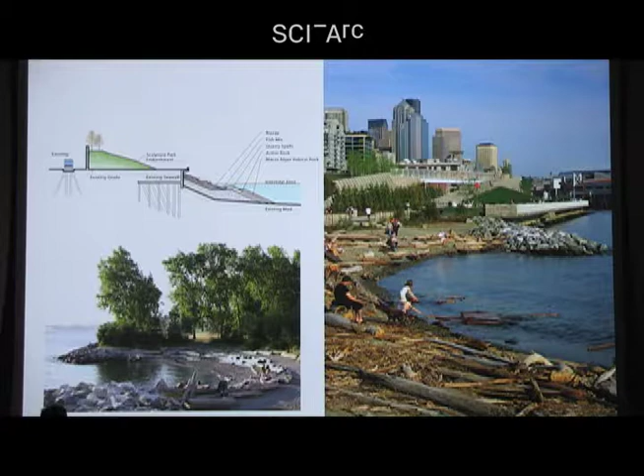This was the waterfront, divided by train tracks and highways, and we actually started to envision it as something truly accessible and part of that landscape, allowing you to look back to the city or across to the water, or in fact have the kind of logs that wash up from the logging industry that create the most amazing beaches. Here we actually worked to pull land away to create a beach and salmon habitat.

That could also even get us to the tidelands below, working with two aquatic specialists who actually created a pocket beach, basically a place for juvenile salmon that apparently like to hang out in a certain sort of setting. We learned a lot about it.